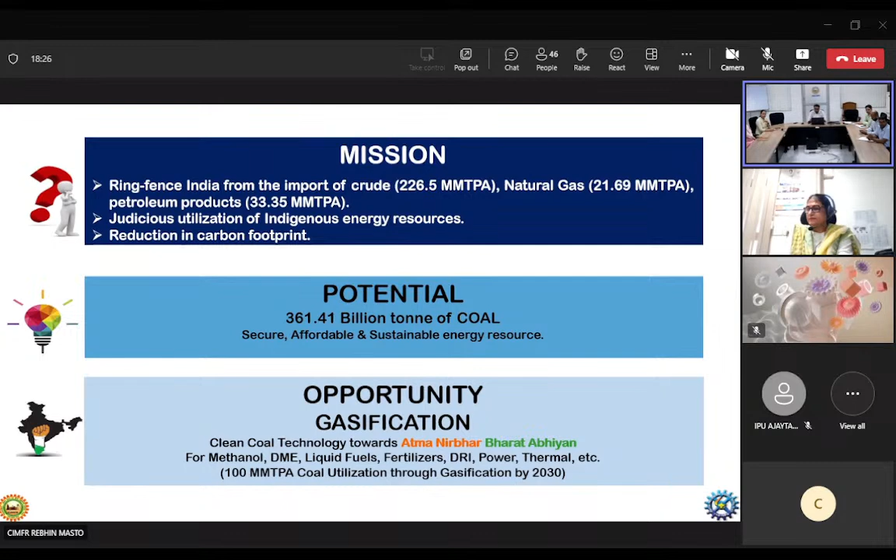So with this particular aspect, the Government of India has initiated a very big program in the area of clean coal technologies to make the country Atmanirbhar in this particular area. And the Honorable Prime Minister has given a target to utilize 100 million metric tons of coal per annum through gasification to fulfill all these requirements. So this was the driving force behind this particular thought.

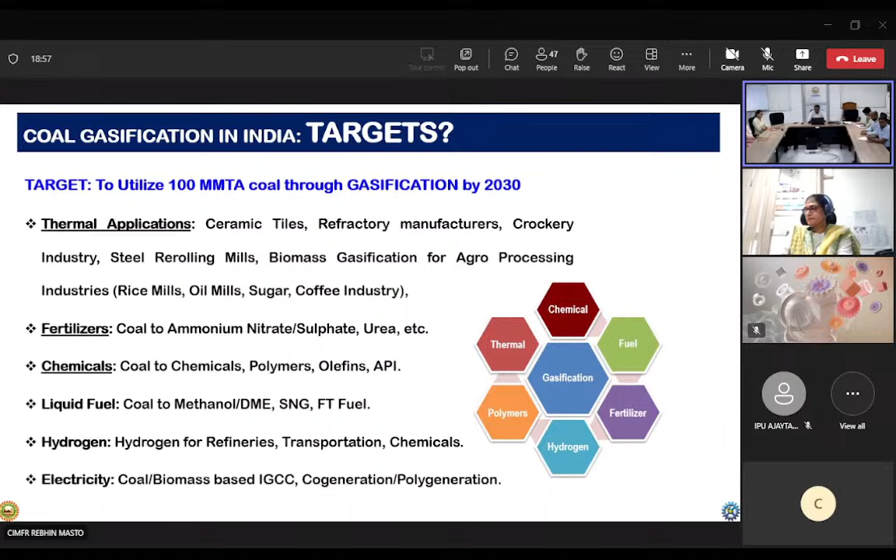And once we convert coal to syngas, we can fulfill most of the requirements, several requirements, right? From generation of fertilizers, chemicals, liquid fuels, hydrogen generation for refineries and other applications, several thermal applications, and definitely power generation also. So once we generate syngas, it is very easy to fulfill all other requirements.

Even with available facilities, we need not go for much switch over or develop other utilization facilities, except the gasification island. These are just figures related to coal reserves in India. We have sufficient reserves for at least another 30 years, we can say.

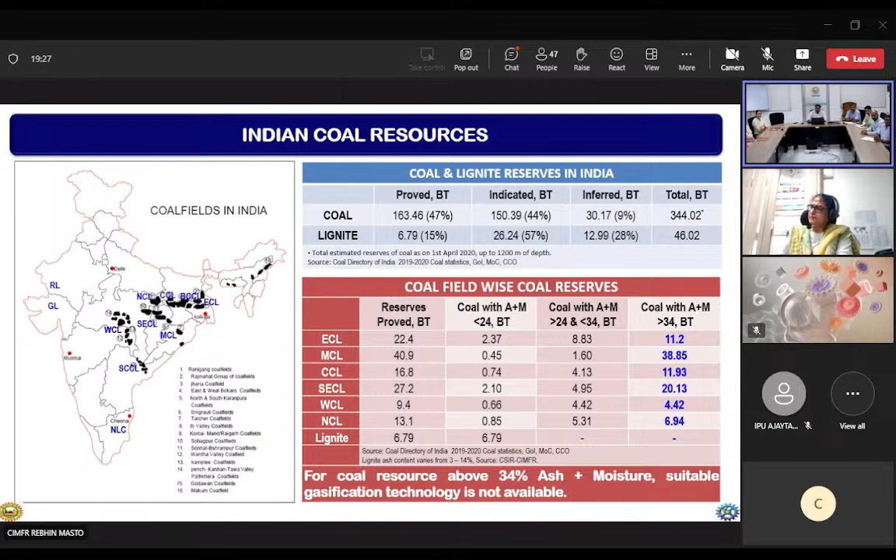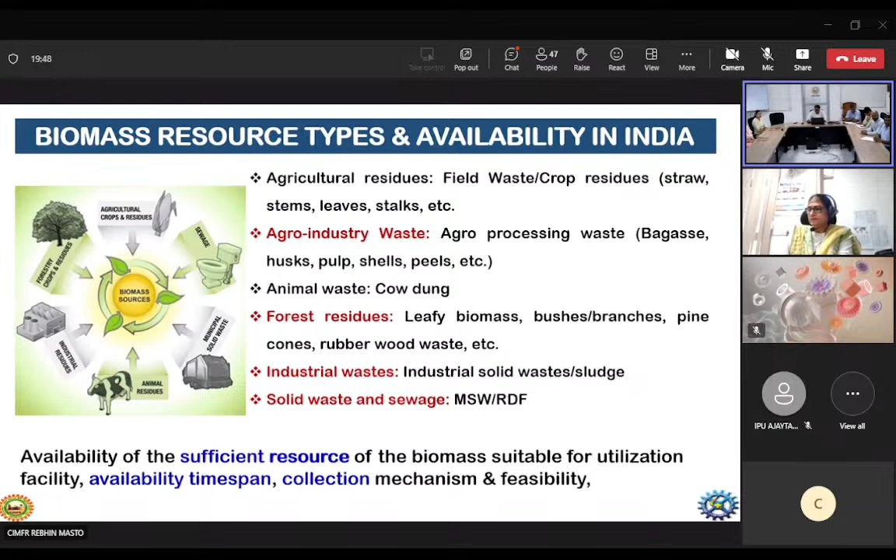Similarly, biomass resources are also available everywhere. The only thing is it is in distributed form, but definitely we can initiate from agro industries at least, where we can get a certain amount of biomass in readily available form.

So with this particular background, NITI Aayog initiated this particular program, we can say the methanol economy mission program. And in September 2015, the first meeting was conducted at the INSA building in New Delhi, where most of the players in the area of solid fuel utilization through gasification, combustion, and other downstream areas, including conversion of syngas to a variety of products, from all over India participated.

Then they also conducted one international seminar at the Manekshaw Center in New Delhi in September 2016. In between, there were several meetings and brainstorming sessions also to come to certain conclusions. And this particular seminar was targeted specifically on methanol economy through gasification.

They formed 5 task forces related to coal gasification based syngas generation, biomass-based syngas generation, syngas utilization for methanol and DME, utilization of methanol and DME-based engines including any conversion or modification, and public awareness activities to utilize methanol to fulfill variety of requirements.

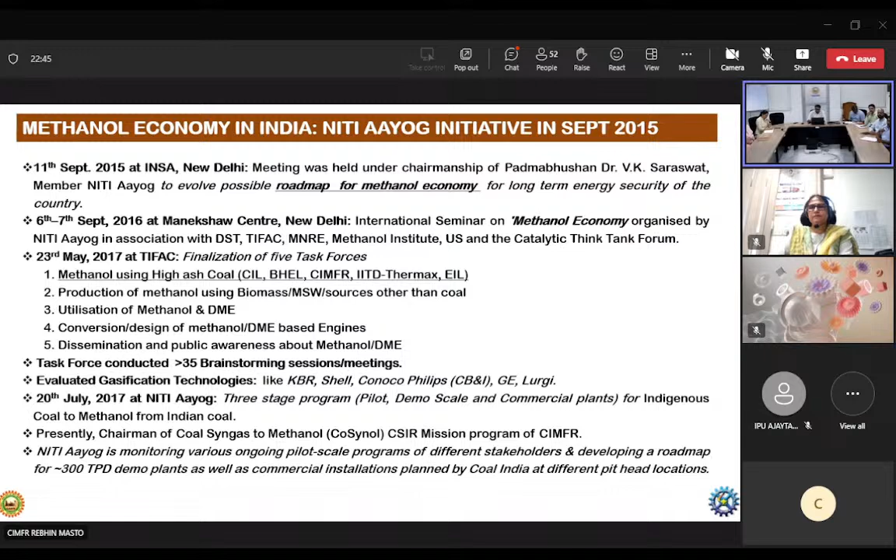Ultimately we arrived at a concrete program, and indigenous gasifier development was one of the major targets, a 3-stage program. One identified program was utilization of readily available technologies to fulfill certain requirements through gasification, but with certain limitations in view of available coal resource in India. Our target was development of an indigenous gasifier.

Fortunately, we had certain background in gasification since the last 2 decades, as did other institutions in India. So the first target was development of pilot scale facilities, then demo scale facilities, then after comparison with commercially available technologies, final commercial scale implementation at different pithead locations, to fulfill the target of utilizing 100 million metric tons of coal through gasification.

At that stage in our country we had little experience, but not that attractive. Most of the projects were executed in the 70s and 80s, but most were closed within just 5 to 10 years.

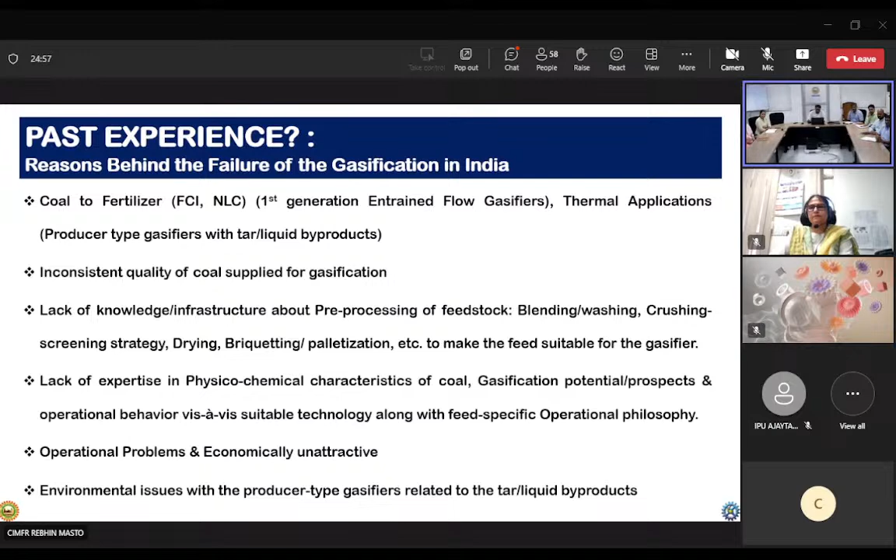There were certain issues related to lack of understanding of the feedstock, which is linked with how to resolve operational problems and improve efficiency to make it more economically attractive. Due to these lacking areas, those programs were stopped within 5 to 10 years.

In the current scenario in India, two big capacity projects exist, but with imported technologies. One is at Jindal Steel and Power Limited, Angul in Odisha, generating syngas using a Lurgi gasifier, utilized for steel making through the DRI process. Another important project is by Reliance, but that is not through coal, it's petcoke, utilized for variety of applications.

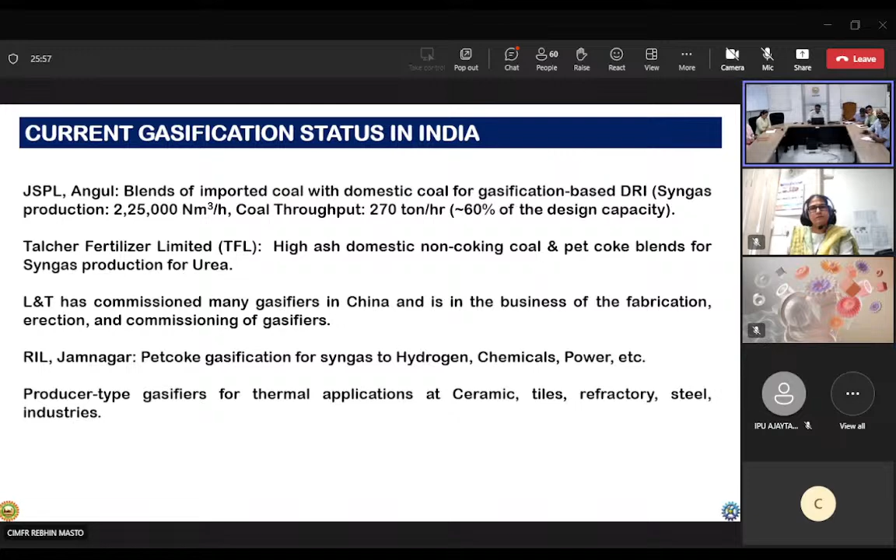One project is in pipeline at Talcher, Talcher Fertilizer Limited, expected to be installed by next year, 2024. Other few small scale gasifiers are producer type, crude gasifiers to fulfill certain thermal applications in variety of industries.

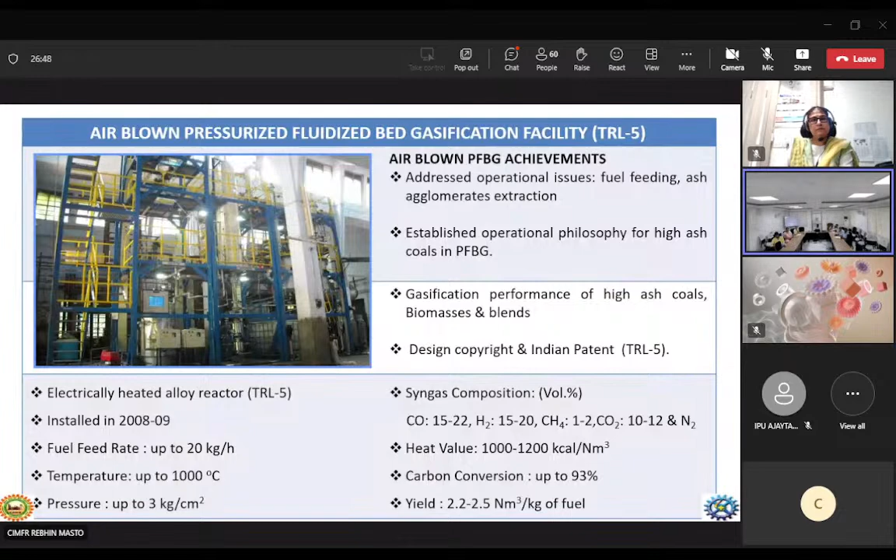At CSIR level, we had one air-blown gasifier developed in 2009 at CSIR-CIMFR. We tested variety of feedstocks including coal, biomass, and their blends to generate syngas. But since it was air-blown, the generated syngas was lean, not suitable for methanol or chemicals, fertilizers. So the necessity was to develop an oxy-blown gasifier; air-blown was not sufficient. But at least we got certain experience and confidence with this facility.

At that stage, these were the aspects we knew related to gasification - definitely the chemistry as well as certain engineering aspects. Other institutions had that type of knowledge available too. But the important aspect related to operational issues and feasibility is that it's a very complicated phenomena consisting of highly complex hydrodynamics, several parallel reactions, and highly heterogeneous feedstock. So proper understanding of the feedstock, specifically mineral matter behavior inside any type of gasifier, is very much essential.

This was the particular issue in failure of gasifiers in the past in India also, and even people are still facing issues mainly due to this particular aspect.

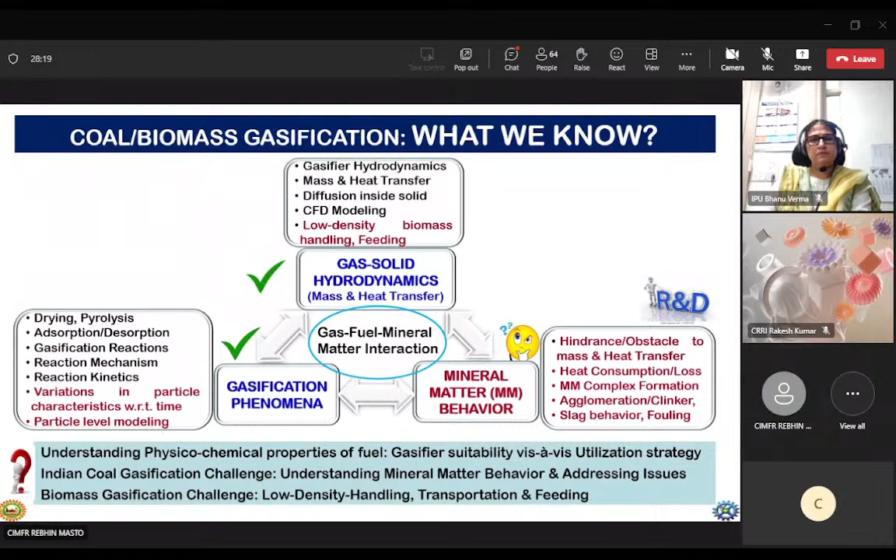A thorough understanding of the feedstock and mineral matter, meaning ash inside the gasifier, is very much essential to overcome all the challenges and to make the process easy to operate for any industry and economically feasible also.

With this background, CSIR-CIMFR decided a program consisting of three major targets. One, development of a center of excellence consisting of all the facilities required for gasification potential mapping, meaning understanding the behavior of the fuel and its relevance with matching gasifier, its performance inside the gasifier. So all the facilities were necessary.

The next target was development of a fluidized bed gasifier, definitely oxy-blown, to fulfill the requirements of targeted products like methanol, fertilizer, and all those type of things where we definitely require concentrated syngas.

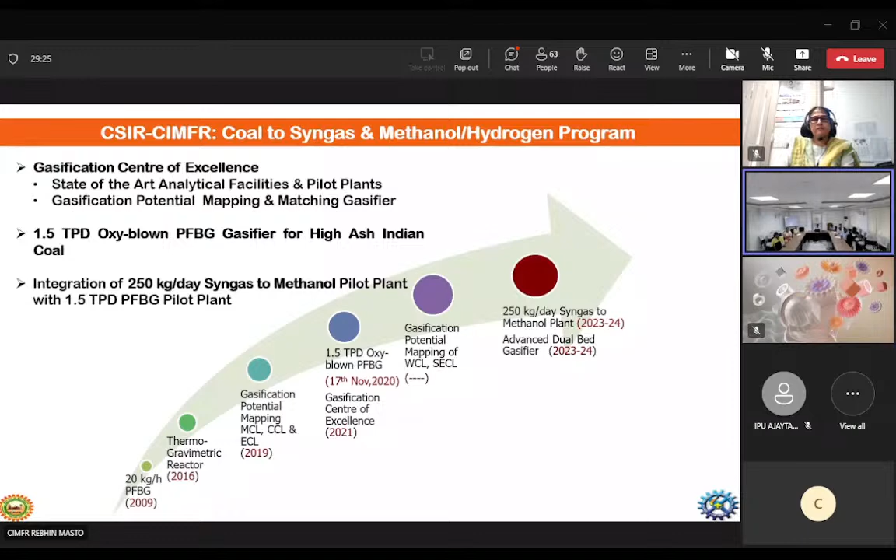And then our next target was development of a syngas to methanol pilot plant. With these targets, we developed a center of excellence consisting of most of the facilities. Presently, this syngas to methanol pilot plant development is still pending, along with certain advanced other gasifiers which we have targeted. Most of the other things are ready.

This is the Center of Excellence for Gasification at CSIR-CIMFR Digwadi campus.

With these particular targets and facilities, we chalked out the three-pronged gasification program at CSIR-CIMFR, mainly consisting of understanding of feedstock, definitely essential; then development of suitable technology, that is fluidized bed gasification technology; and definitely operational philosophy, because standard operating procedure, SOP, cannot be utilized for gasification-like phenomena, because every time we feed any feedstock, the characteristics will be different.

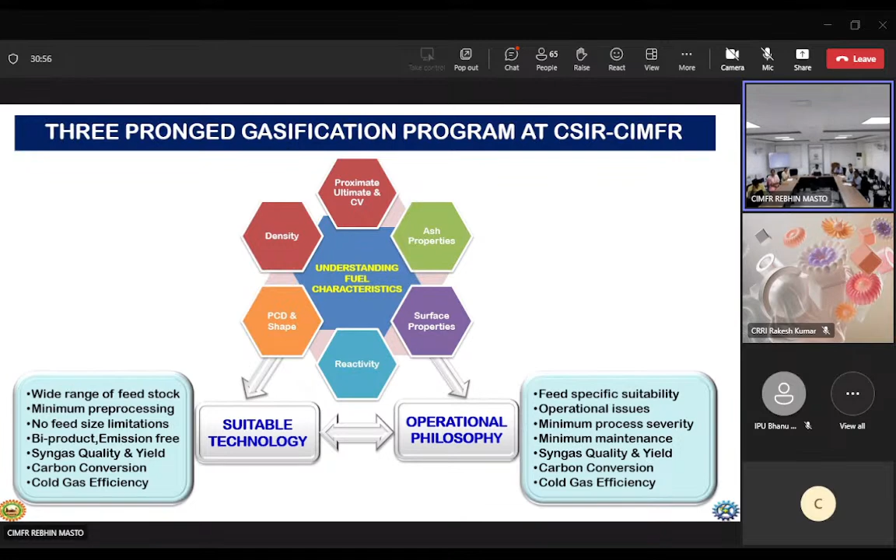So SOP will change with feedstock characteristics. We can call it an operational philosophy. It is, we can say, SOP, but definitely linked with the characteristics of the feedstock. So these three aspects were essential.

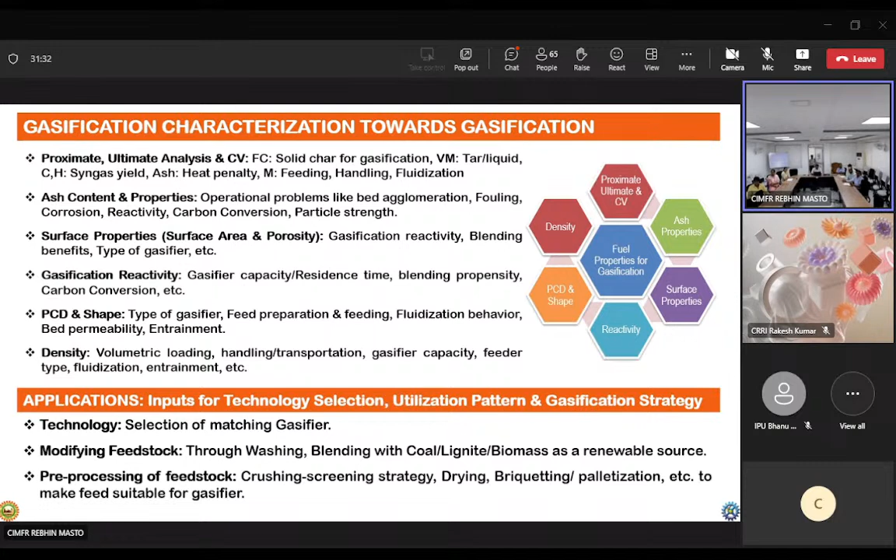We developed the characterization matrix in relation with gasification, where several characterization tests were developed at our department research group, and we made a complete characterization matrix to address all the aspects of gasification, to understand the entirely complete phenomena, ash behavior, and all those things, which is very much essential for gasification.

With this understanding, we conducted one important activity jointly with Coal India, where we analyzed gasification-related characteristics from three subsidiaries of Coal India, MCL, CCL, and ECL, for thorough analysis from around 36 to 40 identified mines by Coal India, on the basis of its availability as feedstock for another around 20 years.

And all those were non-linked mines for any ongoing project. This particular report, consisting of complete characterization and suggestions towards selection of gasifier and its behavior inside the particular gasifier, this thorough report was submitted to Niti Aayog for further roadmaps and decision making.

Then the next target, parallelly we executed, was development of a 1.5 TPD oxy-blown pressurized fluidized bed gasifier. Initially, the target was to develop an oxygen enriched PFBG, because we were not confident about oxy-blown, whether we could develop it or not, since we only had experience in air-blown gasification. But after systematic development, we achieved its operation in oxy-blown, completely oxy-blown mode also.

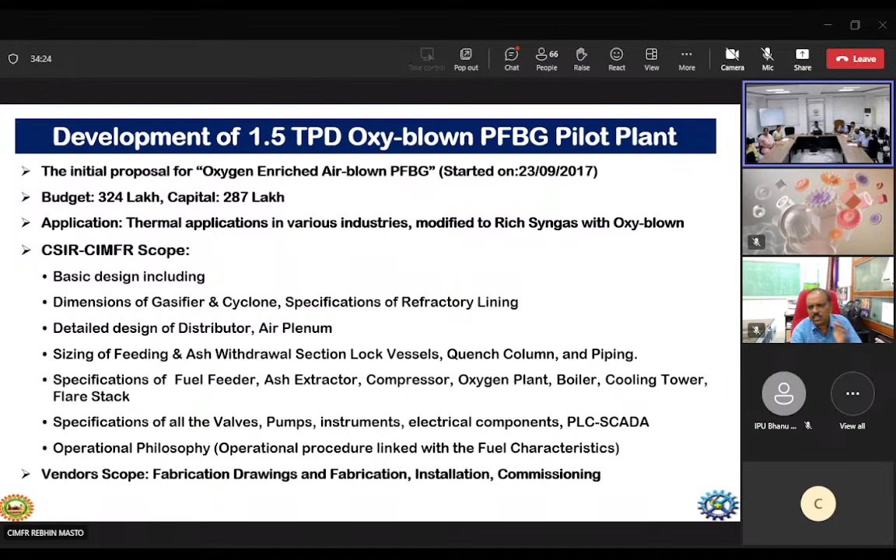And fabrication, installation, commissioning was in vendor scope. So we initiated the tendering process for getting this particular facility.

But it was very difficult to get potential vendors at Dhanbad due to locational disadvantages, because most of the chemical industries are in the western zone of India, and service providers for fabrication, for instrumentation, and all the related things, it was very difficult to get here.

Also, quotes were on the very higher side from experienced vendors, so getting L1 was very difficult. And definitely, to convey properly our exact requirement to the vendors, it was very much essential to get the perfect facility. So we conducted a series of pre-bid conferences and site visits to make them understand our requirements clearly.

In this way, we conducted two attempts of tendering, and in the second attempt, we successfully got an L1 firm. Certain aspects were unattractive for them, including payment terms, and certain components, since it is a pilot plant, so capacity was very low. These components like feeder, extractor, all those are not standard items.

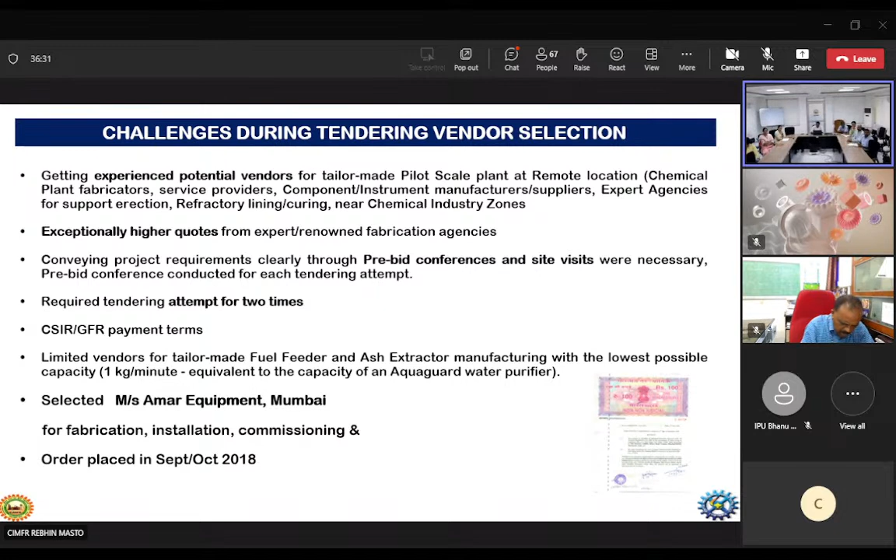Tailor-made fabrication of a single or one or two pieces of this type of item was very difficult. Nobody was ready to fabricate these types of items. So ultimately we successfully got L1 firm, that is Messrs. Amar Equipment from Mumbai, and the order was placed in September-October 2018 for development, fabrication, installation, and commissioning of this targeted facility.

Thus, fabrication was going smoothly. We were conducting visits at their workshop frequently to support them, to analyze and monitor the fabrication work, whether it was in the right direction, because solid handling requires certain precautions to ensure smooth flow and smooth operation of the solids inside the particular device.

Another challenge was that since the target was to install this facility in the readily available existing building at CSIR-CIMFR, we did not have sufficient space between the targeted plant and the roof of the existing building. So this was also one of the challenges.

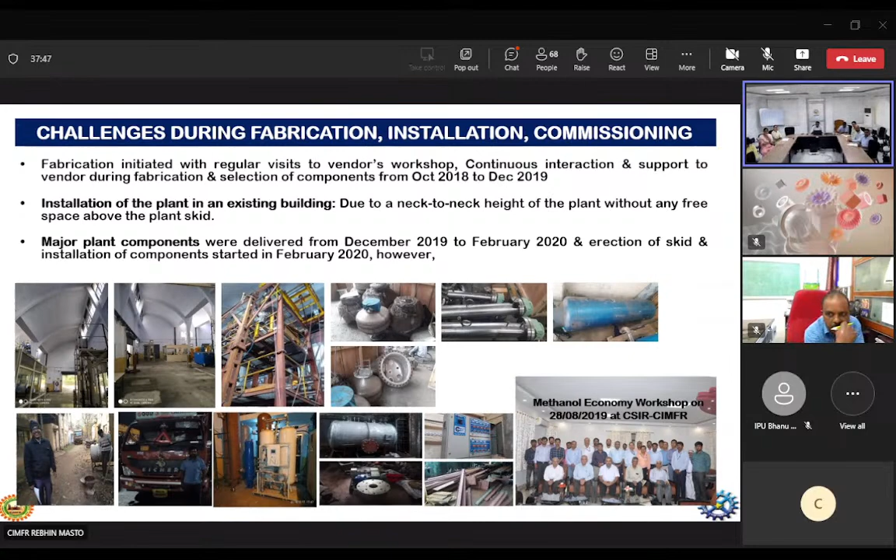Thus, we got most of the components delivered between December 2019 to February 2020, fortunately. We initiated erection of the skid and mounting of certain components after this period. But unfortunately, the government imposed a lockdown due to the COVID-19 situation from 25th March, and everything was stopped.

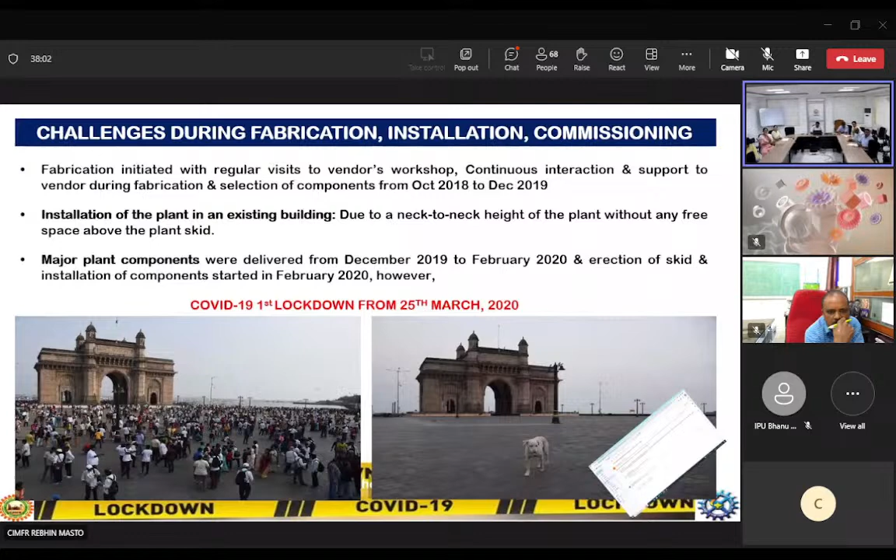Fortunately, the installation team was at our site with limited manpower at that time, required for initial activities like installation of the skid and certain fabrication and piping related activities, along with the refractory lining team from their sub-vendor. So only these two teams were there at that time.

During lockdown, activities were halted for a couple of weeks. But with permission from authorities and precautionary measures, we reinitiated these activities. We needed to manage everything with available resources, so we involved the refractory lining team also for fabrication activities with their permission, and continued the fabrication and installation related work.

Definitely we were facing issues related to getting tools and tackles required for fabrication and installation activities at site for piping, including small hindrances like getting welding rods, gas cylinders for metal cutting, and consumables like pipes, fittings, and smaller instruments, because the entire market was closed during that period. But with available resources and facilities, we kept conducting activities.

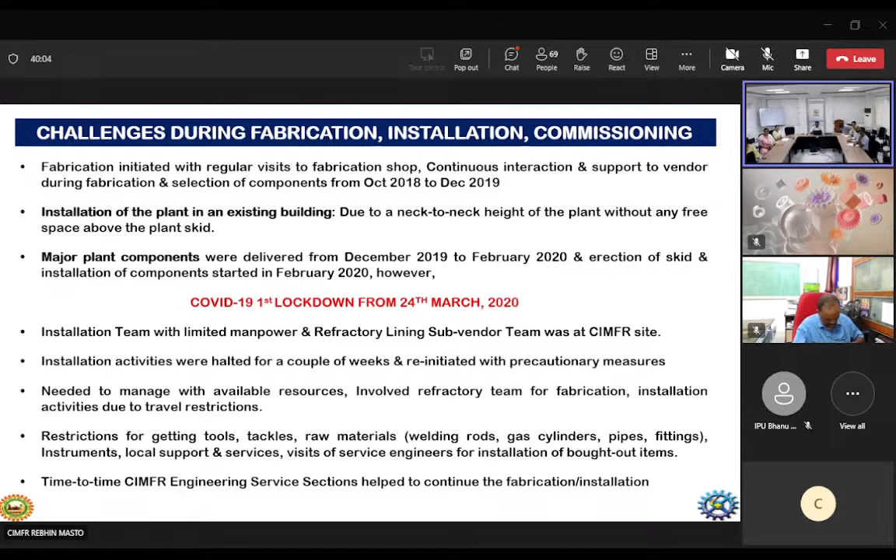We also had certain facilities at CSIR-CIMFR, including a workshop, so our engineering services department helped a lot for execution of this activity. These are certain photographs of the installation related progress right from the zero date.

Among these, the in situ casting of refractory inside the gasifier was, we can say, the toughest activity, because the gasifier shell diameter is just 0.7 meter, and it was necessary to cast the refractory in different stages by sending an expert person inside that particular shell, which had a diameter of 0.7 meter and height of around 5 meters.

We even needed to provide air for breathing through a pipeline. This is actually the standard practice for putting refractory lining inside any type of furnace. But since it was a very small plant with a smaller diameter, we faced a lot of problems. For big capacity plants, they can install refractory lining or in situ casting very easily, but since our diameter was very minimum, we faced a lot of problems.

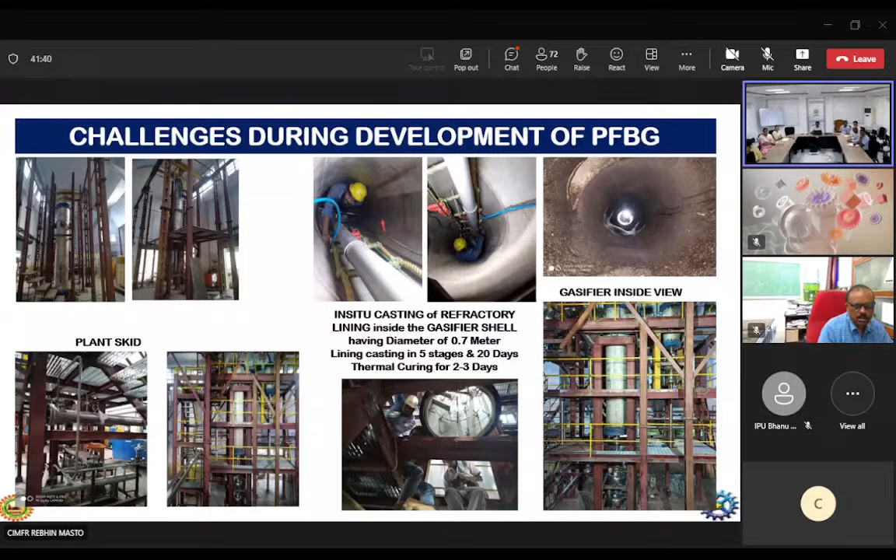Fabrication continued, and we faced a lot of problems because this team was away from their family for several months during lockdown. Their family was facing several issues there. They stayed here for at least 6-7 months, and it was very difficult to bring in a new team or even persons required for further activities like instrumentation, PLC SCADA, automation, and installation of bought-out items.

They were taking help from their sub-vendors, and the available team was installing most of the components with telephonic or video conferencing support. They were staying inside the colony, so they were allowed to work here, but it was very difficult to get any person because very stringent rules and regulations were there related to quarantine and travel.

So we prepared a thorough monitoring document, an Excel based document, where more than 983 activities and components related to this facility were listed. We were reporting through this sheet, showing with different colors what was completed, ongoing, pending, which material was available, and which was not. Everything was reported on a daily basis.

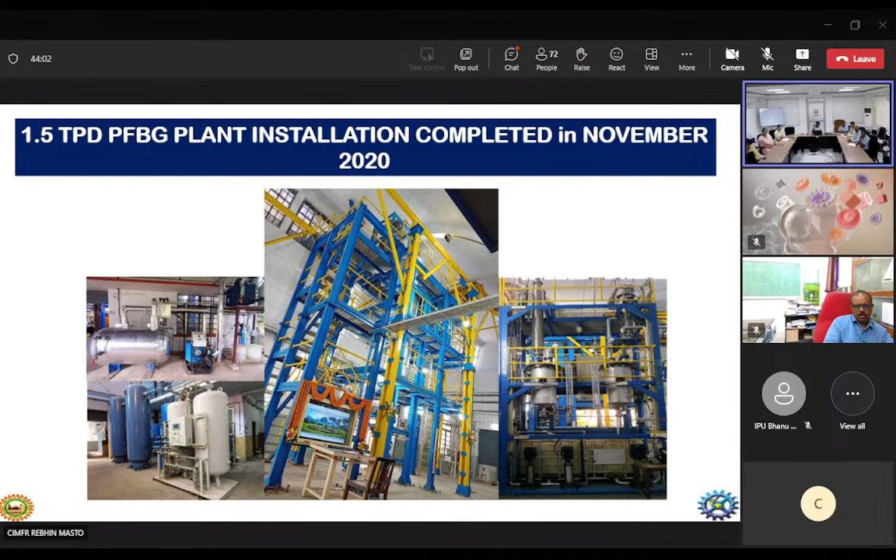This was the facility consisting of all the modules. This facility was dedicated to the nation on 17th November 2020 by the Honorable Minister of Science and Technology at that time.

CSIR DG also visited within that time span, and NITI Aayog member Dr. Saraswat sir, who was monitoring all these activities since it was under the mission mode program. So he also visited and encouraged us for this particular achievement and to conduct further programs.

Capacity of this particular developed facility is 1.5 tons per day. Fuel feed rate, again, varies with type of feedstock; for biomass, it is a little on the lower side. Operating temperature is in the range up to 1050 we can go, and pressure up to 10 bar. So we tested a variety of feedstocks, coal from different locations, MCL, CCL, definitely high ash coal, and we conducted cumulative operation, including biomass rice husk specifically, for more than 200 hours till date.

And the syngas composition we achieved is very attractive for downstream applications. CO and hydrogen are in the range of 25 to 30%, which is quite comparable with commercially available gasifiers. Carbon conversion is a little on the lower side for coal when we compare it with other high temperature gasifiers, but still it is acceptable for industries when we have some ash utilization techniques. Ultimately, we filed a patent and have taken copyright for this particular development.

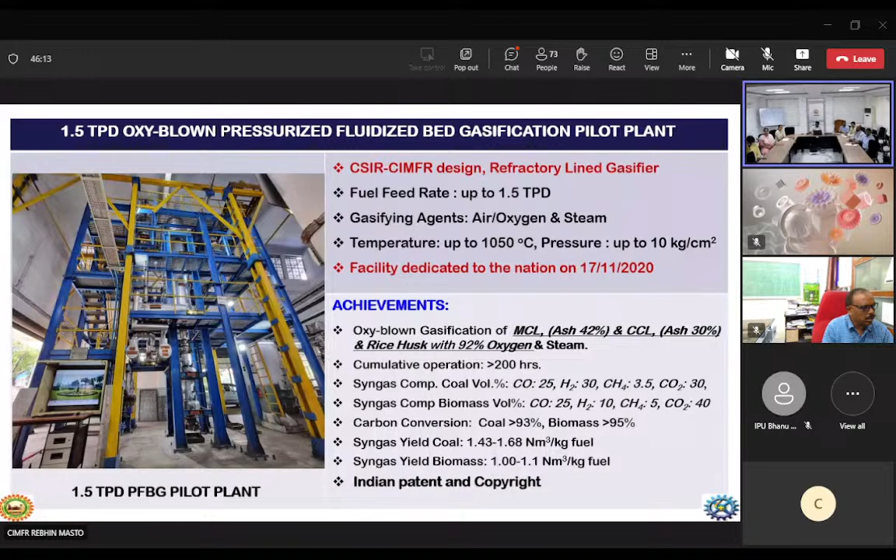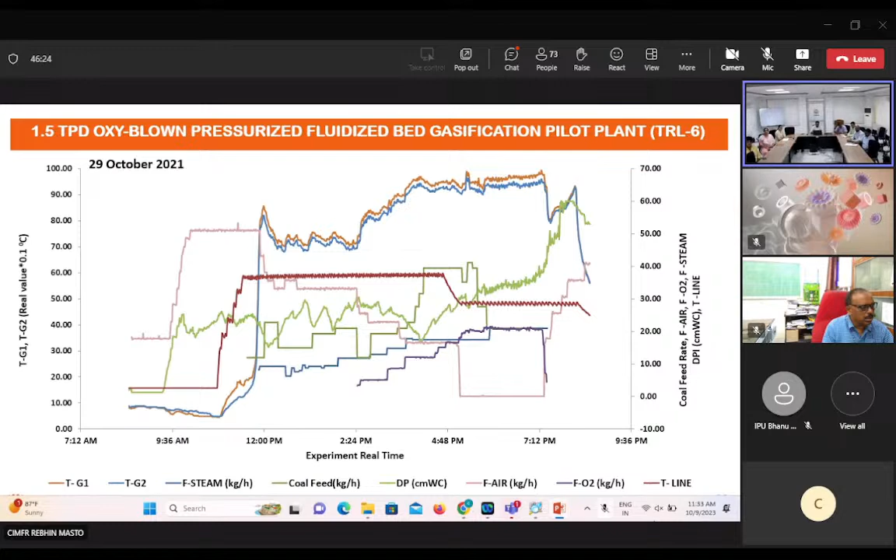In a summarized way, the achievements are: now we are generating completely tar-free syngas for any downstream application. We have overcome all the operational problems, including agglomeration, with high ash containing feedstock. We have successfully developed an operational philosophy linked with the characteristics of a particular feedstock. And now basic engineering data is available for development of a demo scale facility also.

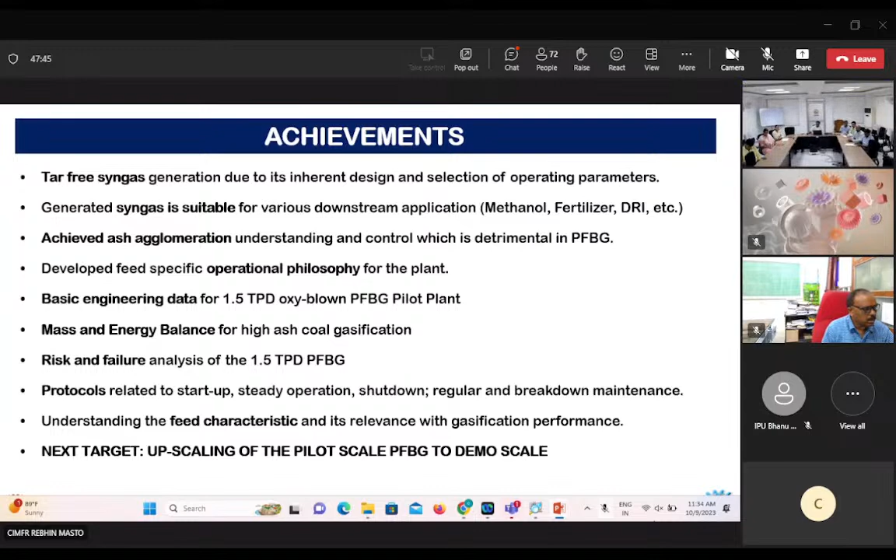Mass energy balance, risk and failure analysis, protocols related to startup, shutdown, breakdown maintenance, routine maintenance, everything is now available with us for each and every module, each and every component of the plant. And a proper understanding related to feed characteristics and its performance inside the gasifier. That entire package is available. The next target is the development of a demo scale facility on the basis of these achievements. As an outcome, a pilot scale technology is readily available now with us, which can be taken forward.

A complete, thorough physicochemical characterization matrix linked with its behavior and performance inside the particular gasifier. We have two Indian patents, one for this PFBG gasifier, another for the associated development of TGR. And we have two PCT patents also. 4 copyrights are there, more than 10 publications and 2 book chapters. Several students have completed MTech projects. One PhD already completed, 4 are ongoing.

Several students have completed their internship and training programs in this facility from nearby engineering colleges and other institutions, including ICT Mumbai, IIT Jammu, BIT Mesra, and several engineering colleges from this region. We have made presentations for this development at several ministries, including Ministry of Coal, Steel, Chemicals and Fertilizer, NITI Aayog, various international conferences, and academic institutions. We have MOUs now with several institutions for collaborative programs, and also Coal India research group. Several engineering students, domain experts, government officials, and people from industries have visited this facility.

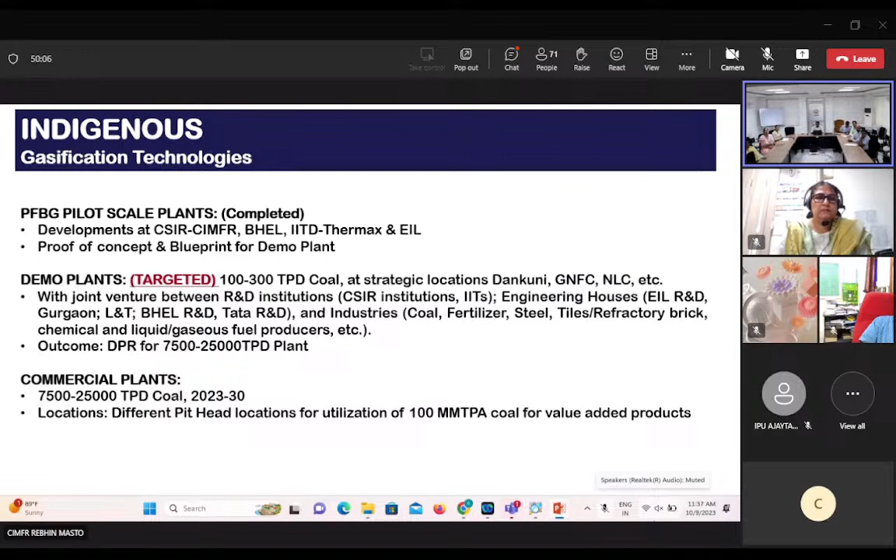Now, the next target is development of a demo plant, but a joint venture is required with engineering houses, industrial partners and other CSIR institutions for this activity. I have listed certain R&D areas for further refinement to make this development more feasible and economically attractive. Further understanding related to mineral matter, handling of low density feedstocks, and modeling and simulation is very much essential to get insights about the phenomena. Process intensification through catalytic gasification is very essential to bring down the operating temperature. Techniques to utilize bottom ash for value-added applications.

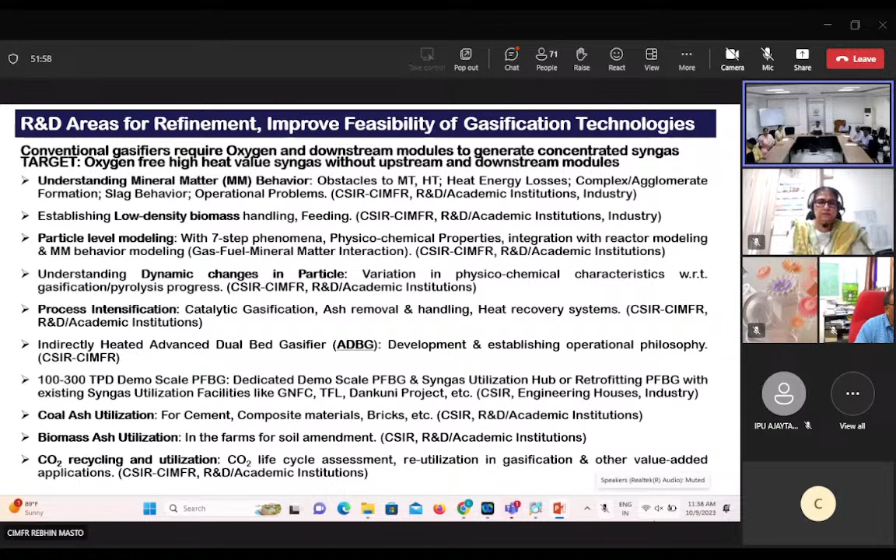More efficient heat recovery systems to make it more economically attractive and environment friendly. We are also conducting programs for development of an advanced dual bed gasifier, an advanced version of this. Coal and biomass ash utilization for a variety of applications is essential. And CO2 recycling and utilization inside the gasifier as well as for other applications. So these are certain areas where CSIR-CIMFR can work together with other CSIR institutions, academic institutions and industries, to address these aspects and make gasification more and more efficient and more user friendly.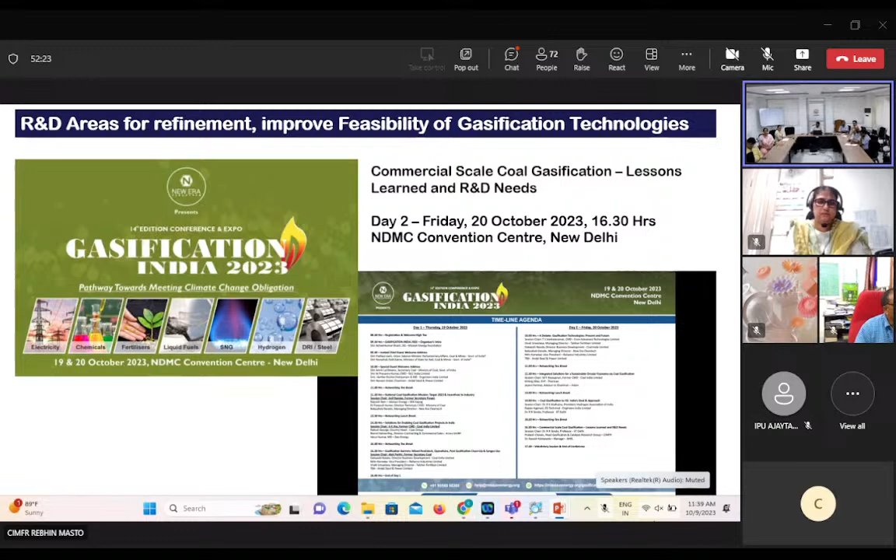All these listed R&D related programs I am going to discuss in the scheduled conference at New Delhi on 20th October of this month. So all are requested to kindly attend this conference and my presentation there.

And now finally, hearty thanks to all the involved stakeholders and agencies, including CSIR, DG, for their support and encouragement, management from CSIR, all the directors from CSIR-CIMFR, and the entire management for their kind support. I'm remembering Dr. B. D. Kulkarni sir for his kind support and encouragement to us. Definitely vendor Messrs. Amar Equipment and their team, and all their sub vendors also.

Our gasification and catalysis research group, all the members, project associates, assistants, and our job contract workers, all the engineering service departments from CSIR-CIMFR, purchase, account, administration, stores, and all the committees linked with this project, TNPC, TSCs, Research Council members who also encouraged us for this particular activity, specifically our mentor, who was an RC member, Dr. T. Mukherjee sir from Tata, Jamshedpur.

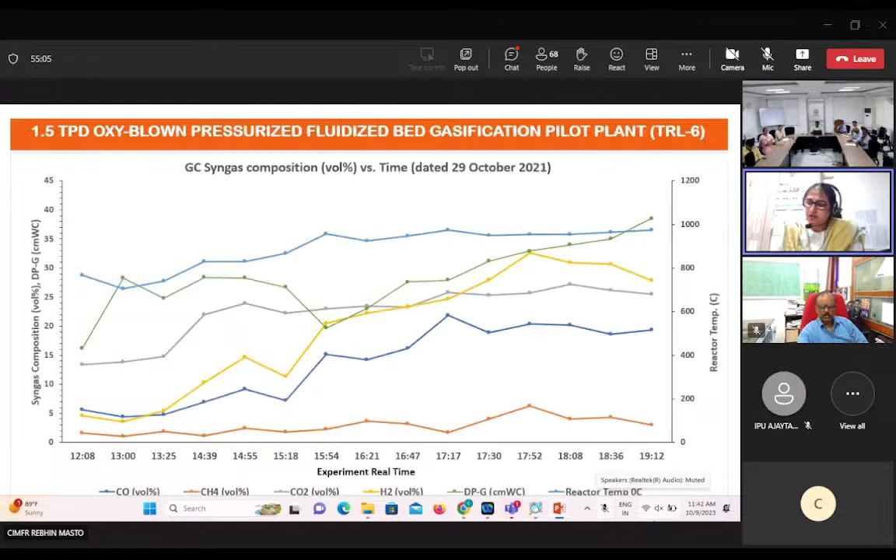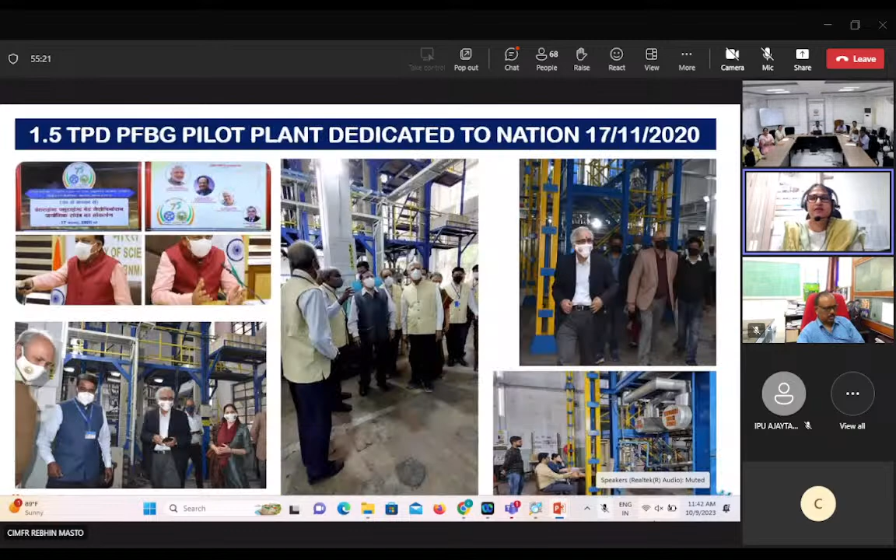You're welcome, Dr. Chavan. So it was a very elucidating lecture on the journey of the fluidized bed gasification facility developed at CSIR-CIMFR. Dr. Chavan spoke at length about the required procedure for creation of the coal gasification facility at CIMFR Dhanbad, and all the administrative procedures that were adopted, the purchase, the EOI and all those things, the process required to establish a center of excellence of coal gasification, as projected in the slide, at CIMFR due to his effort, along with the effort of his team, I'm sure.

And before we proceed to the question answer session, there are a few questions that come to mind directly, because you talked about coal gasification for generation of syngas. Two or three questions I would like to ask before I open the field for questions from other scientists and attendees, and that part will be taken up by Lipika, of course. I'll narrate my questions first, and then you can take them up, Dr. Chavan.

So the first question is, why syngas production? Because the coal can be utilized as such. What is the benefit, and what are the disadvantages of syngas production? I understand syngas contains a mixture of gases, not only hydrogen and methane, but also carbon monoxide and carbon dioxide and other components in trace amounts. And the production of syngas seems to be a very high energy intensive process, while we are using it for production of energy, that is conversion of syngas to mostly electricity.

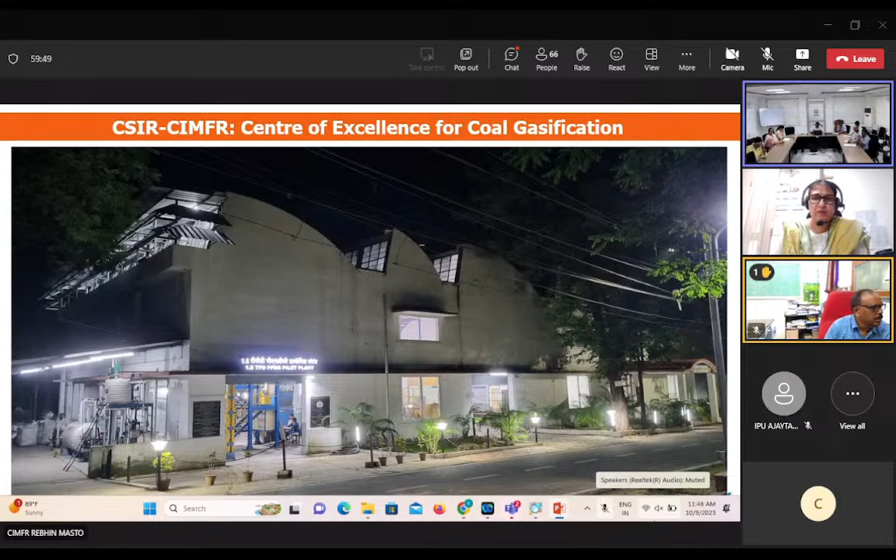As I read, it is around 1400 to 2000 degrees centigrade that you are raising the temperature, and that temperature will require some energy consumption for heating. So definitely. Yes. So 1400 to 2000 is maintained in other types of gasifiers, entrained flow gasifiers. That is different, which we are seeing in these readily available gasifiers.

The left side one. Ours is operated up to 1050 degrees Celsius. Fluidized bed gasifiers are generally operated below 1100 degrees Celsius. Definitely, 1000 degrees is not a lower temperature; it will require energy. But the major difference is when we talk about direct utilization of coal. We can utilize coal, but only for power generation in power plants by combusting it and utilizing heat. One can generate steam, drive a turbine, and generate power.

But when we target applications like methanol, fertilizer, steel industry, hydrogen generation, thermal applications, and other chemicals, syngas is the key. Once we generate syngas, several applications are there through which we can eliminate use of petroleum products and natural gas, which is not available. If it were available, nobody would go for coal. But in India we do not have those resources, or very limited resources, and coal is abundantly available.

So we are converting coal to syngas, and syngas can be utilized to fulfill all the requirements we are currently fulfilling through petroleum crude, natural gas, or importing chemicals from other countries. So the target of gasification is to fulfill other requirements, not only power. Power is co-generated utilizing some syngas or waste heat at different levels of gasification through heat recovery. And if somebody targets only power generation through gasification, it is still comparable or more efficient than thermal power plants.

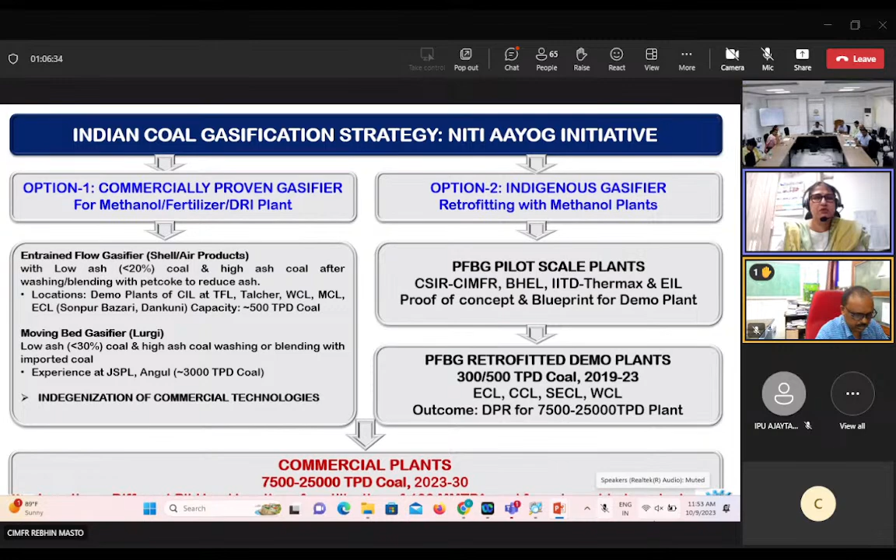Only the gasifier shell and downstream facility remain common. Once we convert it into syngas, it doesn't matter whether the syngas is from coal or biomass. But the feeding section is different for both feedstocks. And you can generate hydrogen from the same process, from biomass also. Yes, from both, as we have shown here.

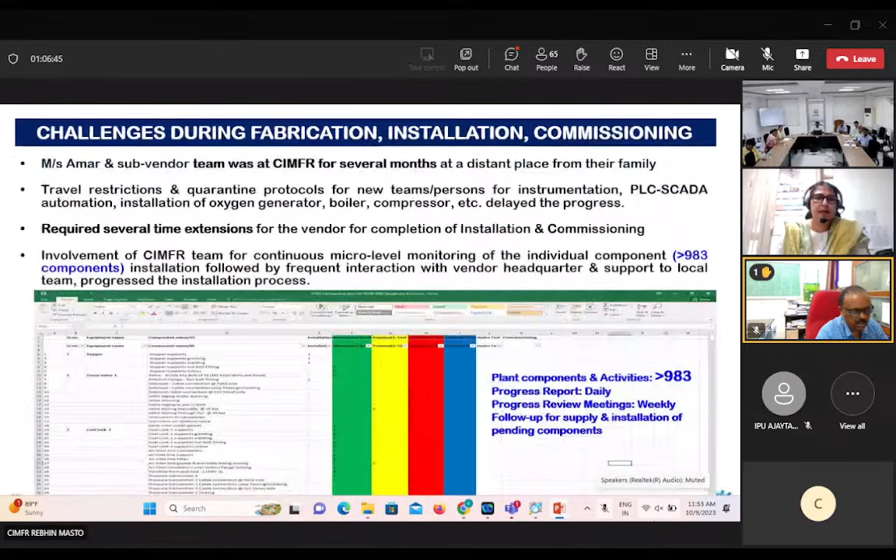But has that been used in any industry in India for hydrogen generation? Yeah, because here we can see with coal we get 25 to 30% hydrogen as well as CO. But in case of biomass, since capacity goes down due to lower density, we are getting CO in the range of 25, but hydrogen is just 10% in the existing facility.

But definitely we have limitations related to capacity. If we enhance capacity, specifically keeping in mind the biomass related densities, one can understand easily: if we try to utilize lean fuel, say CNG or even syngas, in IC engine vehicles or any application for power generation in an IC engine, the capacity of that IC engine goes down to 1/4 of the original capacity we get with diesel. So definitely with lean fuel, capacity will be on the lower side.

In case of biomass, we are getting lower capacity. So the generated syngas is also leaner than what we are getting through coal. But since it is a test facility we are utilizing... Suppose we intend to install a commercial facility, say a 2-meter diameter is required with coal, and we try to install the same capacity gasifier for biomass; in that case the diameter will go to at least 2 times or more to get the same capacity.

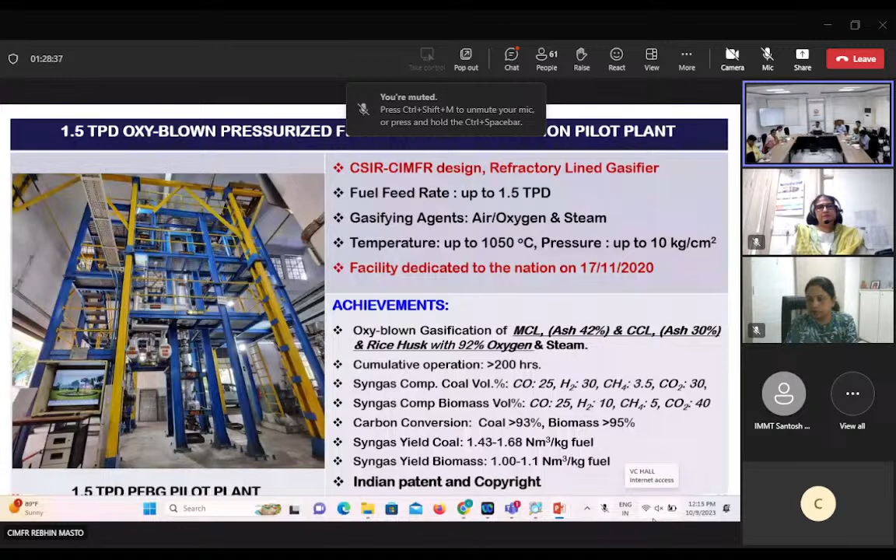Yes, definitely. I will put this statement in reverse direction, because since we are having high ash containing coal, that's why we are developing fluidized bed. Otherwise, successfully commercialized, readily available technologies are available for low ash containing coal. We do not have much low ash coal reserves, that's why we are developing fluidized bed. Definitely, it handles high ash coal without any issues.

Since it is high ash containing, little inferior syngas we will get compared with syngas from low ash containing coal. But this is the only technology to gasify high ash coal directly without requiring any washing. Another issue you raised related to JSPL: their gasifier requires low ash coal. They were using coal from their own mine at Mozambique. Now they have got mines in Talcher area, and you highlighted the aspect related to washing.

Yes, definitely. You are also aware that Indian coal is of drift origin, unlike coal from other countries. So washing difficulty is there. I am not the right person. You may be knowing Uday Chattopadhyay from our coal preparation department; he is the expert, you can discuss washing related queries with him. But definitely, this gasifier handles high ash coal without any issue. That's why our program is to develop an indigenous gasifier suitable for high ash coal.